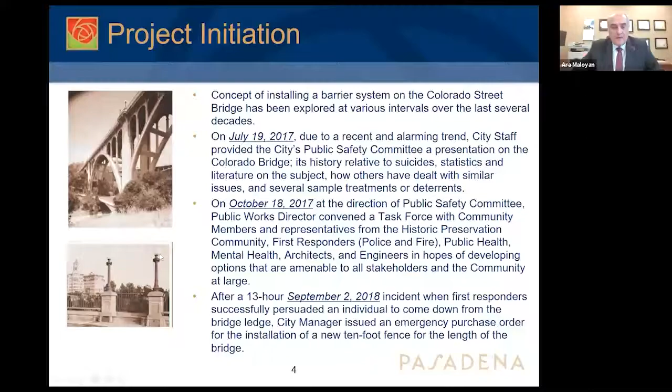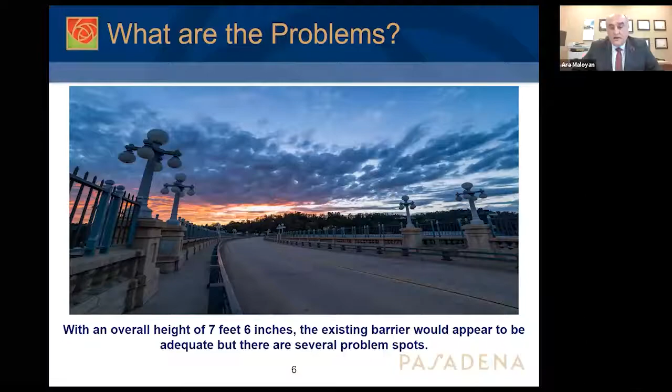Next slide, please. So let's discuss the problem that we identified. The Colorado Bridge was retrofitted. It already had a metallic or picket fence on top of a concrete balustrade system. And even though it had a height of 7'6", it was not adequate to stop people from climbing that fence.

Next slide, please. This indicates the weaknesses of the existing barrier. The concrete baluster was about 4 feet tall, which was a foothold. Then if you stood on the concrete baluster, you had only 3'6" of iron railing to get over to the other side.

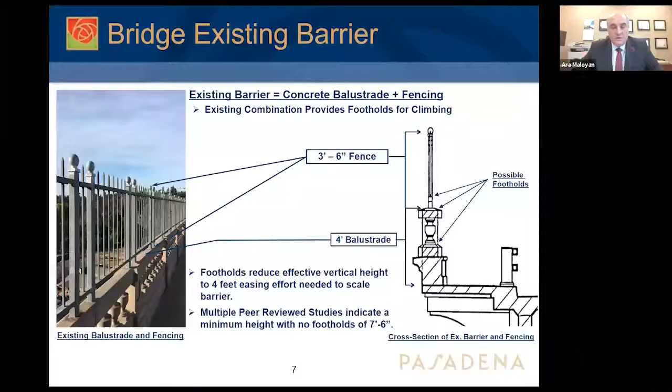Next slide, please. We also found weaknesses in the seating areas, especially what we call alcoves. There were gaps between the fencing and the street light or the balusters for the lights. This was an easy attempt - if you stood on the bench and then on the concrete baluster, you had maybe 2 feet of distance to climb over to the other side of the fence. There are 20 alcoves on the bridge, 10 on each side. This was another identified problem.

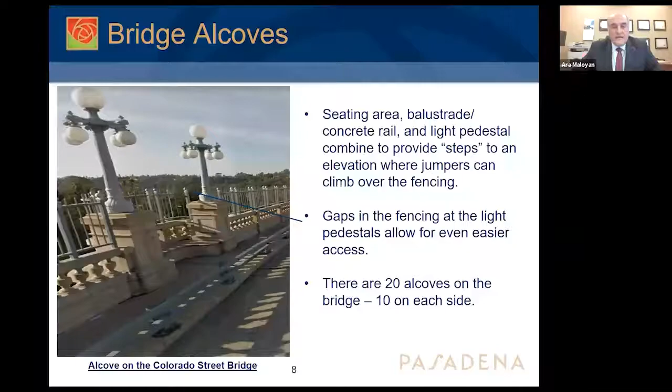Next slide, please. We also identified that at the beginning of the bridge, at the entrances, there was no fencing because the drop-off was not that much.

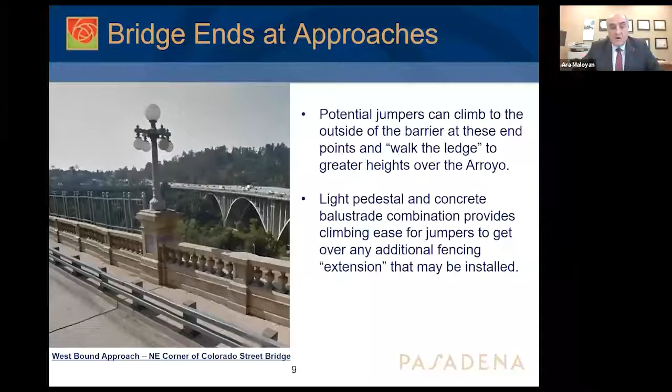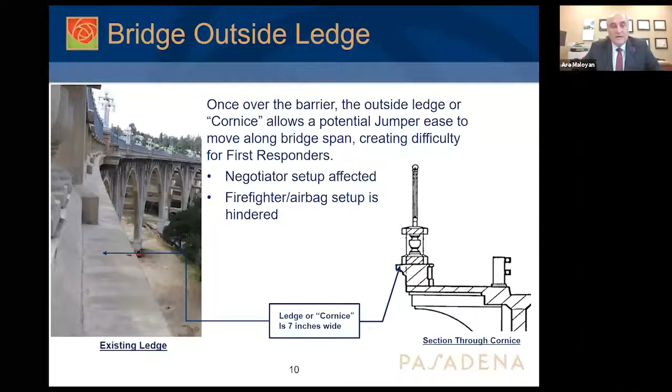People could easily climb this area and walk on the ledge, which we'll show you in the next slide. You could stand on that ledge, and it prevented them from being stopped - they could have walked easily to the middle of the span, and it also hindered negotiations with people attempting to jump. The fire and police departments had a tough time because they would move on this ledge. Next slide, please.

The task force then had several community meetings, and we solicited input from the community, combining all these comments into 5 categories. I'll go over them now, so it's important for us to recap this. There were 5 categories: physical measures, which included physical alterations to the bridge; self-help measures; active measures; post-attempt measures; and changes to the environmental conditions.

So some samples of what these were: one was to install a vertical barrier, add end treatments to the bridge, modify the ledge. For active measures, there were comments that we could install speakers or intercoms on the bridge, have volunteers patrolling the bridge, and install cameras and motion sensors.

Then there were post-attempt measures - if somebody was successful, there would be horizontal barriers, and comments like planting trees and landscaping to soften the fall. Changes to environmental conditions were like modifying the lighting and planting hedges on the bridge. Finally, the self-help measures were signs, phone lines, and text lines to assist folks on the bridge.

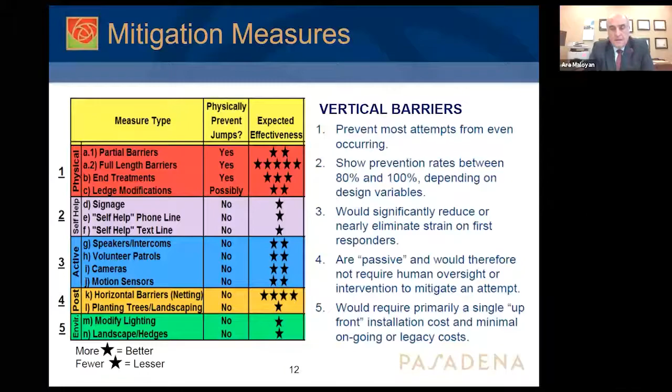So the task force finally came up with these recommendations. The task force recommended to the city public safety committee, and eventually to city council, to install a vertical barrier, 7 foot 6 inches minimum from the highest toe hold, extending both sides of the bridge for its full length. That means the entire length of the bridge will get the same treatment.

Also, we recommended having end treatments so that people were prevented from climbing the slope and walking on the ledge. And we left it open to add any complementary measures - any kind of signage or phone system we had not yet researched could be added to this at the end.

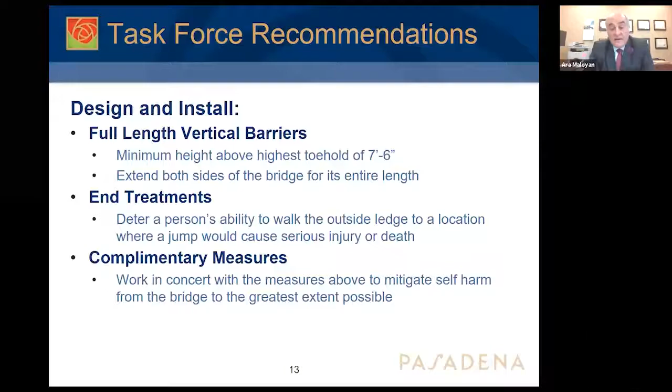So the task force recommendations were given to the Public Safety Committee on April 18th, and then on April 23rd we gave the same presentation to City Council. City Council unanimously approved the recommendations of the task force and directed staff to study the physical barriers.

So when you see the rest of this PowerPoint, it gives you an idea why we're not discussing other preventive measures, because this work was already done. We had our guiding principles from City Council to only look at vertical barriers, which were the most effective at that time. Next slide, please.

Before May 20th, we had an RFP issued to solicit input from consultants with experience in suicide mitigation off of bridges around the world. On May 20th, we went to City Council and awarded a contract to Donald MacDonald Architects for their services. They then started having community meetings and soliciting information on September 26th.

That was our first community meeting, and we had another meeting on October 29th. Then we continued our public outreach through the Historic Preservation Commission, then on to the Design Commission, and finally on February 3rd to the Public Safety Committee.

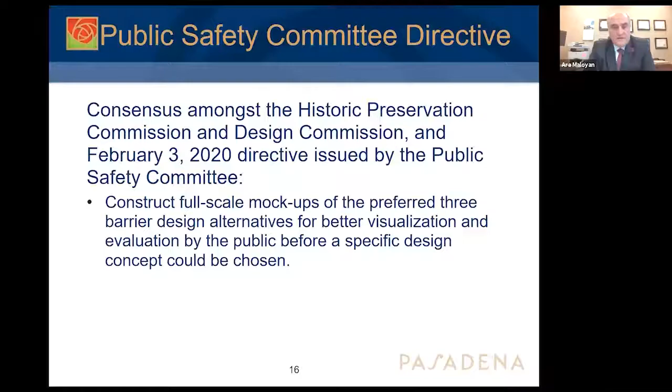Next slide. On February 3rd, the consensus among the Historic Preservation Commission and Design Commission was to construct full-scale mock-ups of 3 preferred barrier design alternatives, so people could visualize the size and effects before any specific design concept was chosen. And then we know what happened after that - we had the pandemic, during which staff were still working on the mock-ups.

The products were delayed, but finally we are here. The mock-ups were installed, and we're starting our community outreach, and we'll talk about the next steps. But at this point, this is just an overview of the project.

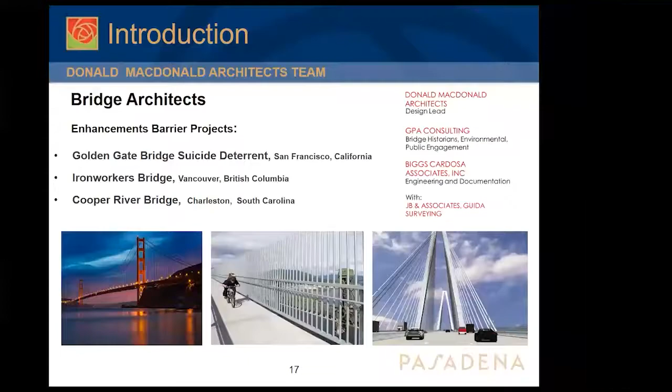Next slide, please. So how do you approach this? Is it just a thing that we're putting up on the bridge? How do you define or design this? We use guiding principles of design, and we settled on 3 core principles.

The first one: the barrier has to be effective. The direction we got from council was to do a vertical barrier. That, as Ara had walked through, is the direction that came out of the task force recommendations. So at that point, we're looking at vertical barriers, and we look for effectiveness.

So what's the effective height? The minimum provided was 7'6". They also talk about toe holds, but we're looking at hand holds, footholds, and other means of climbing the barrier, and making sure we're sealing off the bridge ends.

But equally important is we want to maintain and complement the historic character, defining features of the bridge. After all the public input from our first community meetings, as well as what the task force had heard, clearly the existing balustrade, we wanted to retain that. And then when we looked at the light pedestals, light poles, and fixtures, those are certainly character-defining features of the bridge.

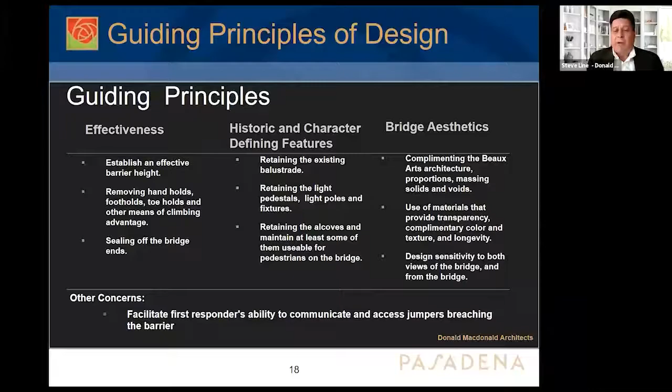I think informing all of these considerations is making sure that we still facilitate the first responders' ability to communicate and access jumpers that, for whatever reason, were able to breach the barrier. We did not want to prevent a direct means to get them back. As Ara said in that one slide, even after 13 hours, they were able to successfully get somebody back, and we did not want to impede that ability.

So next slide. Just a few things on barrier effectiveness. We look at climbability. Based on our studies and analysis, we thought 7 foot 6 inches was really the minimum. We find that being able to reach a horizontal element that you can pull yourself up and over is 9 feet from a position where you can't jump, and 10 feet if your foothold allows you to stretch. Many people can jump up to 10 feet, and usually 9 feet is just outside the grasp of most people. So that's one of the informing criteria we used on finding an effective height.

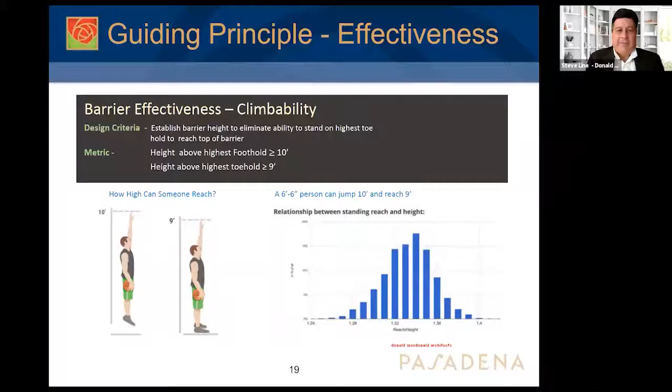Next slide, please. Certainly it's not just reaching, but people are very adept at climbing. So we wanted to make sure that we eliminated the ability to climb lamp poles or shimmy between poles and the barriers and other methods of climbing and breaching the barrier. That also informed keeping the stretch and grasp distances to the top of the barrier around 7 feet. This informed, and I'll talk about this later, where we had to position the barrier around the alcoves, leaving them open but still protecting people from the ability to climb up the poles.

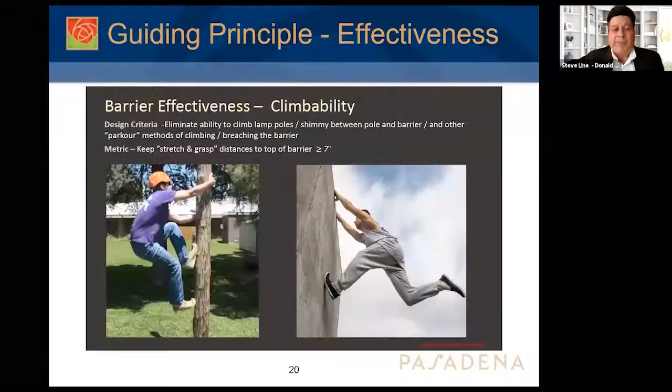The next slide, please. Again, the historic and character defining features. I've talked about the alcoves, but also the pilasters that the lamps are sitting on, and as I mentioned earlier, preserving the balustrade. These were key elements that we wanted to preserve as character defining features of the bridge. Yet each of these elements provide footholds and toe holds and the ability, as Ara said earlier, to climb on and get up and over the barrier. So we had to take all of that into consideration.

One of the considerations we looked at is what the impact would be to the lamps themselves, their current height and proportions, again character defining to the bridge. So what are some mitigation strategies we can use to retain and maintain that and still provide the effectiveness we're looking for? We'll talk through that. We did at one time consider actually lowering the bases of the lamp poles to be more in line with the top of the balustrade, giving us a bit of an advantage, so the barrier itself may not have to be so high. But in earlier meetings it was decided that the height of the pilaster was more desirable.

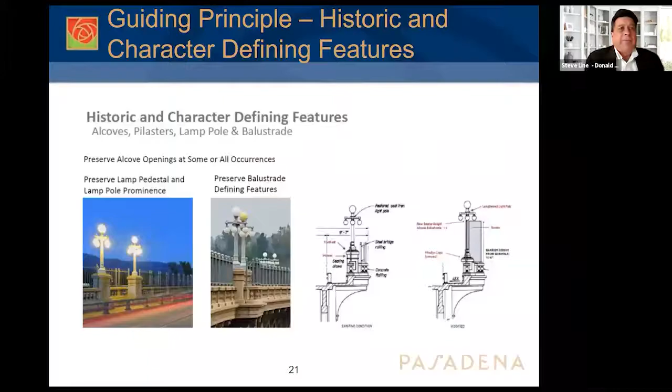Next slide, please. I'd like to ask Don MacDonald to give us some overarching ideas on the guiding principles of the bridge aesthetics and a little bit about the bridge.

Thank you, Steve. I'm glad I'm still part of this team, and that we're still serving this major heritage bridge. What I like about it, there's a vocabulary out there. As Steve's probably mentioned earlier, the elements up on the bridge now are for transparency. The theory is to continue with the vocabulary of the bridge, massing solids and voids, and bring that into the barrier detail later. The transparency is very important. I think Steve pretty well covered everything, but I'm really concerned that the bridge has a long-lasting design to it, so we'll work very hard to finish up this rail. We're very sensitive, over the past, at least in my experience, to the suicide issue. So I think this solution is well on its way. The transparency is very effective, I think, with those prototypes that are up there. But that's about it for me, Steve.

Thanks, Don. Appreciate that. As Don said, some of the character defining features in the bridge aesthetics we're incorporating include the pattern and rhythm of the balustrades, the corbels, and the elements coming off the top of the arches. There's also a hierarchy of structure implied in the bridge. Some of our posts and vertical elements of the barrier are in alignment with these existing features. They do change over the length of the bridge depending on the span of these arches, so our fencing details or barrier details will follow that pattern and rhythm, changing accordingly to match.

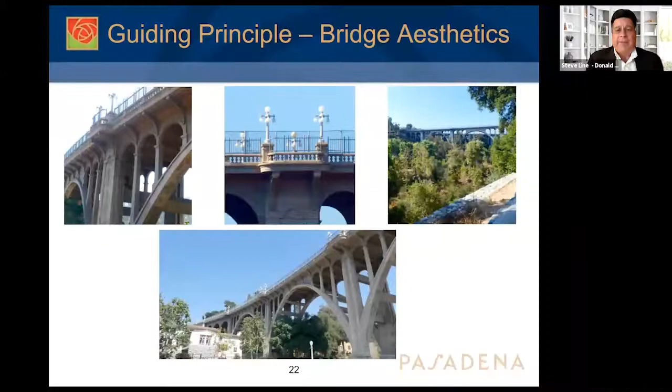I'm going to talk as we get into some of the more of the mock-ups, what the intent was, and still some of the options that we're looking to refine the look of it to dial it in. So I'm going to talk about options and mock-ups, but I just wanted to talk quickly about a few things.

We had limited opportunities on the end of the bridge with the lamp poles to do a lot of mock-ups. We chose the two that are out there now, and we'll talk about those, A and B. And then we put two panels out in the middle of the bridge, fundamentally to do two things: to see how transparent these panels are looking, the views of the bridge. In the proportions we decided on the mock-ups at this point were to minimize the amount of material that's necessary to frame the barrier.

To make sure that we're being as unobtrusive and providing as much transparency as possible, to the point that from a distance, some of the material basically disappears and you're just left with the frame. We know that there's some work left to be done to get the frame proportions a little bit better. But at this stage, we just wanted to see what our minimum options were to be able to still meet all the seismic, structural, and wind loads and yet provide the transparency.

The other thing that we'll talk about in a minute is the materials, and I'll go through that in a bit. So looking at the effectiveness, so that would be the height and the ability to climb or inability to climb. The bridge aesthetics, which has a lot to do with the transparency and the blending, and then as well as retaining the historic character defining features of the bridge, alcoves, the balustrade, and the lamp poles.

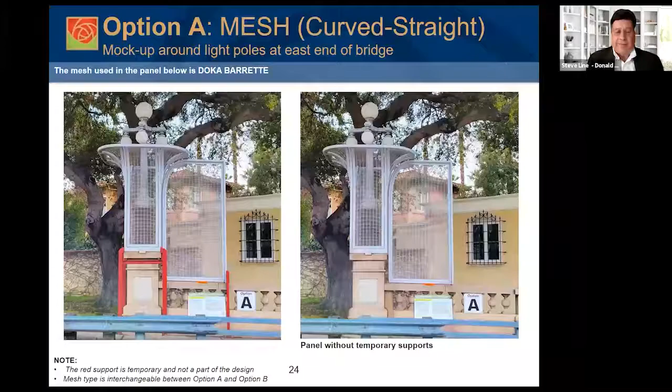Next slide, please. This is what we're calling option A. I wanted to point out, if some of you that go out there notice that we don't have any of the mesh material on this particular installation in the back of the lamps, and that is intentional. It keeps these from becoming baskets, if you will, for trash and debris. It saves cost, and from a visibility point of view, when you look at it from the other side, the mesh fundamentally disappears. So the idea here is that from afar, looking at the views of the bridge, it's really not noticeable, but that's why we're doing the mock-ups, to get everybody's thoughts on that as well.

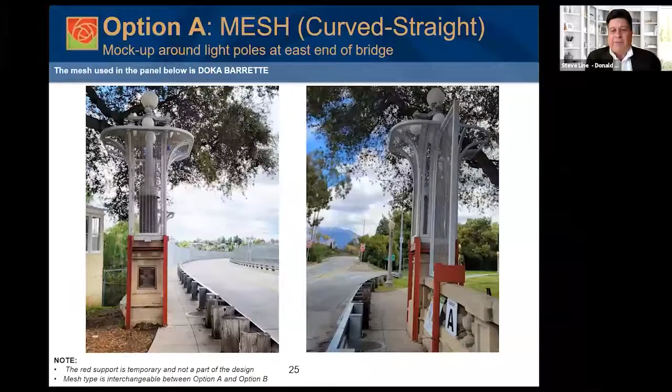So that's this slide, and this is what we're calling option A. We're going to show some different illustrations. This one is showing what the barrier looks like spanning between the lamp poles, and how the lamp pole treatments in parallel work, giving us the ability to keep the alcoves open and still have an effective barrier, eliminating the ability to climb the lamp poles. The detailing at the base is such that there's really not an ability to get a toe hold at the top of the pilasters.

And we're retaining a 14-foot high barrier along the length of the balustrade, so that anybody climbing up there still has an extremely difficult time to get over that. Almost nearly impossible, we hope.

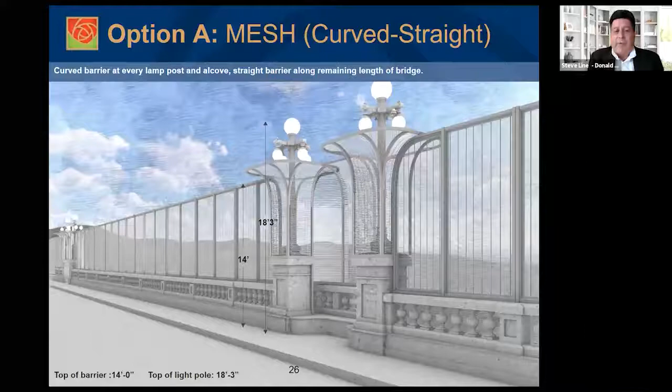We're going to talk about the materiality, but I'll mention that this particular material we're showing is a stainless steel mesh, with a lifespan of 80 to 100 years at least, if not more, and it's meant to be highly transparent. Some of the early areas we looked at were actually using glass panels or some type of clear solid panel between the posts. But for wind loads, and a bunch of other criteria, we felt we could get almost the equivalent transparency for most of the experiential elements of either driving on the bridge or viewing the bridge. But again, we wanted to do the mock-up to make sure that assumption is correct.

So this is what we're calling option A. Again, here's the view on the bridge. You're going to see that depending on what material we selected, the transparency is quite good with almost any of the materials we're looking at when it's perpendicular. But when you're looking along the bridge, the more vertical elements, like in the pickets, that's what we call stacking, and pretty soon you don't see through the pickets anymore. What you're really looking at is pretty much a wall of metal without the transparency. So that's one of the key defining elements. Besides the look of these barriers, there's also the functional difference in transparency.

This is a view of the bridge, and again you can see the patterning matching the corbels. This is very simple, non-decorative. We're not trying to copy any of the arches or pick up an element of the bridge, making this look like it was installed at the same time the bridge was built. But at the same time, keeping it simple and transparent as much as possible, retaining as much of the visual character that we can.

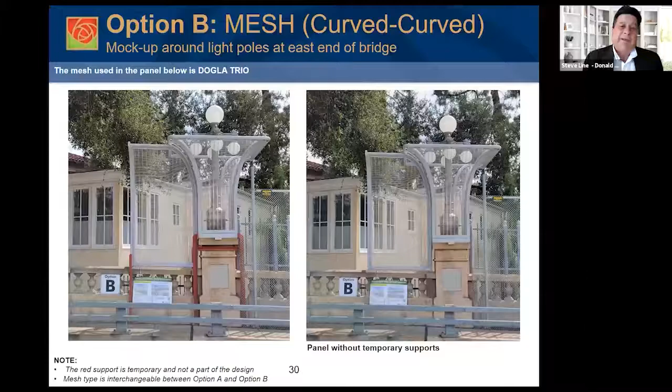In this version, we've tried to eliminate as much of the structural framing around the lamps as possible to provide the most transparency. Steve, this is Don. I think what's good about this one, the curve, is it does pick up the curve of the arches below the bridge, so there's a bit of a tie back in that existing vocabulary.

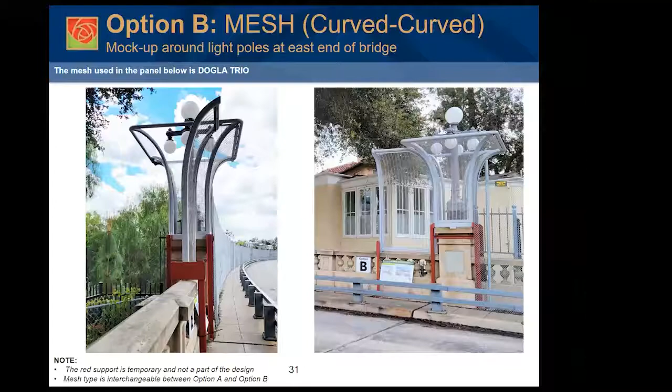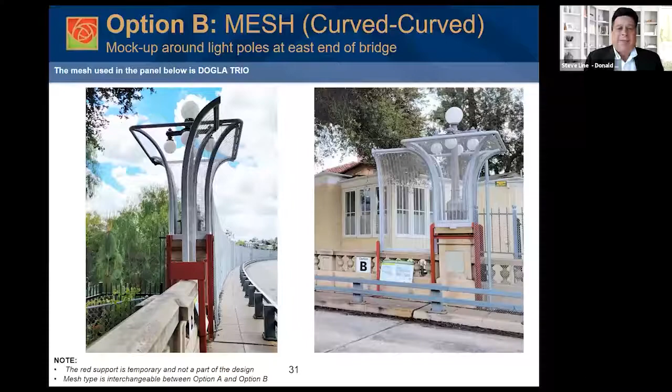Yes, thank you, Don. We were also very intentional about using a curve, a portion of a curve, that minimized as much as possible what people would call the standard Caltrans fencing effect or the prison effect. So this is not a straight radius curve at all—it's a multi-radius curve, so it's got a much more organic shape to it, picking up on some of the architecture of the arches below, really trying to minimize and avoid as much as possible that sense that this is a curved barrier like a prison wall. It's much more meant to complement the arches and at the same time reduce the overall height of the barrier and the treatments around the lamp poles, while still retaining the full effectiveness of the barrier itself.

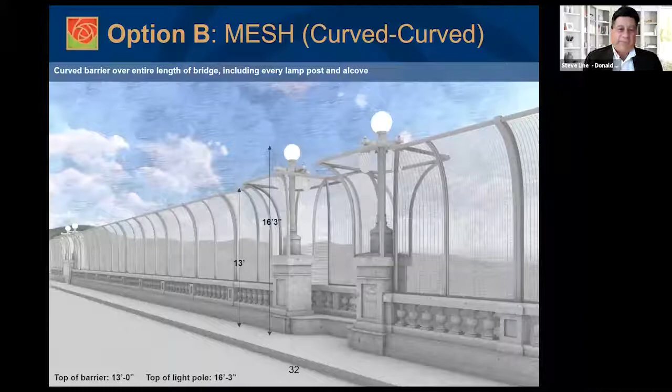So again, the view of what this looks like. Certainly there's a whole spectrum of opinions on if this concept's successful or not aesthetically, but it is lowering the height, and the view of the bridge is almost the same. It's just when you're on the bridge, it does pick up that curve pattern.

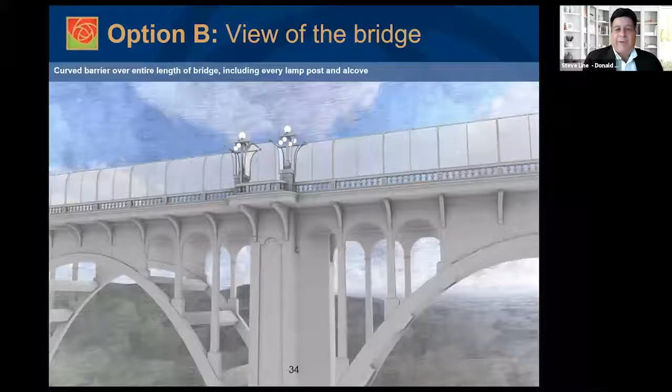And then this is looking at it from below. Again, almost indistinguishable once you start to step away from the bridge, and it's as light and transparent as possible. So that's option B. Now, option C.

We just did the panel on the west end of the bridge, and pickets. There was a lot of interest in looking at pickets, which is pretty much identical to what's out there now, only raised to be a more effective height. The problem with pickets is they're highly breachable.

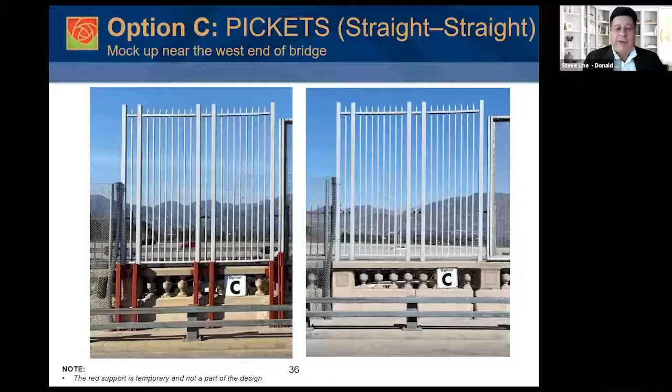So this is really introducing many more options for people to climb over it, like that parkour method, people shimmying up posts. This presents that opportunity much more than the mesh. And I'll talk about why the mesh, it's woven fine enough that you can't get your fingers or toes in any of those slots.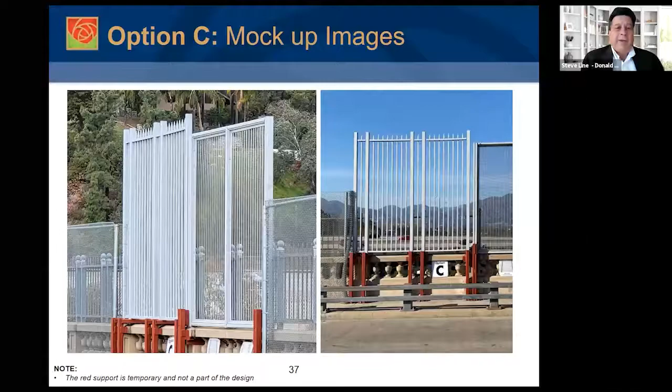It's an attractive solution, but as you can see here in this slide on the left, you can start to see that stacking effect I mentioned earlier, where the pickets start to fill in the field of view. This is not really that much of an angle, and while the mesh maintains its transparency, the idea behind the mesh is to maintain that transparency.

So with the pickets, I think many people find this attractive when you're on the bridge, and looking at it at a standstill. But as you can start to see in some of these images, again, it's a wall of pickets, and so you lose the transparency looking through it. Not completely, but certainly much more so than you do with the mesh.

If you go back to the previous slide real quick, you can see that it's a similar wrap around the lamp poles. These aren't flared. We can do this with mesh as well, so it doesn't matter whether this is picket or mesh. You'll just have to use your imagination filling in the different materials.

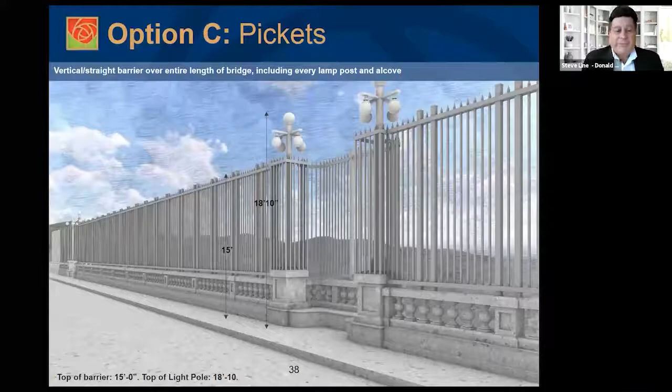But now you can see the height of this is 15 feet to accommodate these horizontal rails that the pickets require for constructability, and it pushes the lamp poles up quite a bit. So this option is the highest barrier and requires the most modification to the lamp poles.

So again, this is just on the bridge. And so this is the view of the bridge. And as you can tell, when we do this, even though many people find this quite attractive, it is now competing a little bit more with the bridge itself. It's becoming an architectural element of more substance.

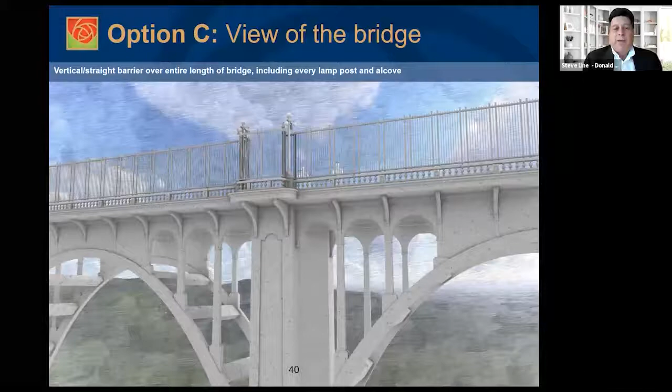And with that, then it's starting to be more part of the bridge and less a treatment. I just throw that out there without an opinion on which ones appeal the most to you, but there is a distinction there.

And similarly, where we saw that the mesh barrier material starts to fade away quite effectively, just the pure fact that there's more steel up there with the pickets, it certainly does not blend in as readily.

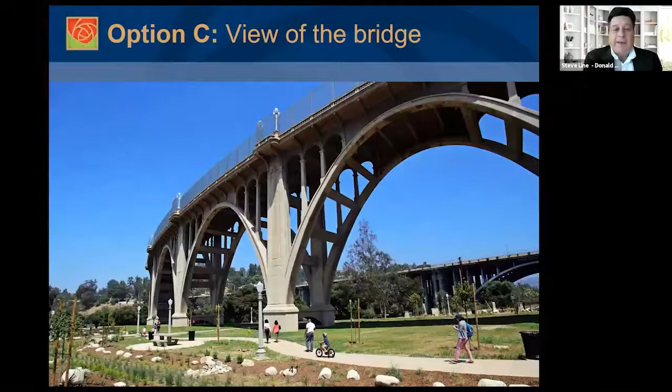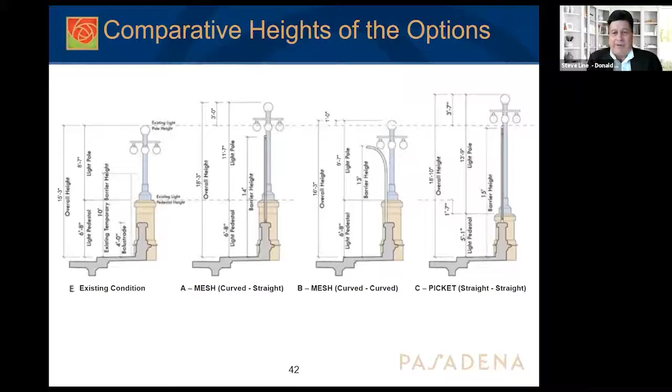Again, this will be on the website. I think it already is, but these are just some of the comparative tables that you can see with these various options.

We think A and B are similarly effective, with B being a little bit less tall. C is the most tall and at the same time the least effective.

From a historic preservation standpoint, with the character-defining features in option A, we're retaining the light pedestals at their existing height, but putting a base on the light pole of nearly 3 feet. After looking at the mock-up, we can adjust that to exactly the right height. Option B, by introducing the curve, lowers the overall profile, so we only have to lengthen the light base by about 1 foot, which is less intrusive to the light poles.

For C, we actually have to lower the light pedestals because we've got to eliminate that bottom toe hold. So we lower the pedestals and have a higher fence. I just wanted to share this as a comparative table.

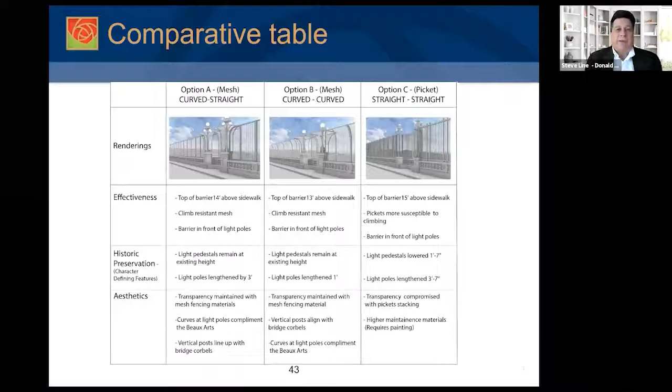I want to talk a little bit about what we have up there in the form of mesh. This mesh that we selected has a bright finish on it, and I know it's been highly reflective in the afternoon sun. We can mitigate that, but this was the available material we had for doing the mock-up. So we went ahead and used it, but I want to suggest that we're aware of and have means to eliminate a lot of that glare, if not all of it.

What you're looking at here is stainless steel mesh, with the distance between the openings such that if you go out on the bridge you can feel it, but you can't get your fingers in there, you can't get your toes in there. So you're not climbing over this.

We did study many different patterns of this mesh, but we wanted to make sure that whatever we chose first met the effectiveness characteristics, met the transparency characteristics we were trying to maintain. The patterning and style is really experienced only when you're right up against it, and from a distance it kind of disappears a little bit.

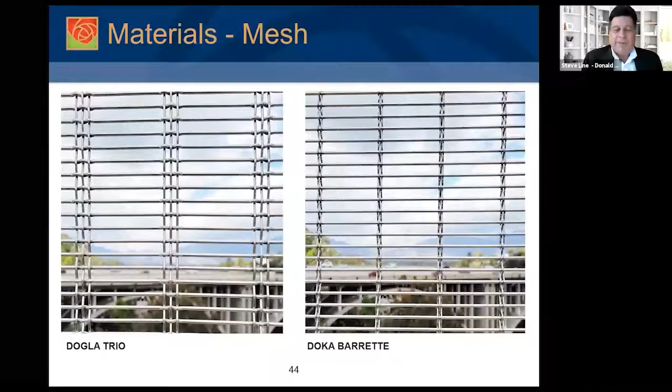Please vote on or take a look at this. I think I've talked about the mesh and the pickets.

The intent of these panels in the middle of the bridge is to give you a sense of the scale, the proportion, the height difference, and also the transparency. These are really meant to be looked at from afar, from the various vantage points around the bridge, which is why they're out on the center, so you can take a look and see what they look like on the bridge from a distance.

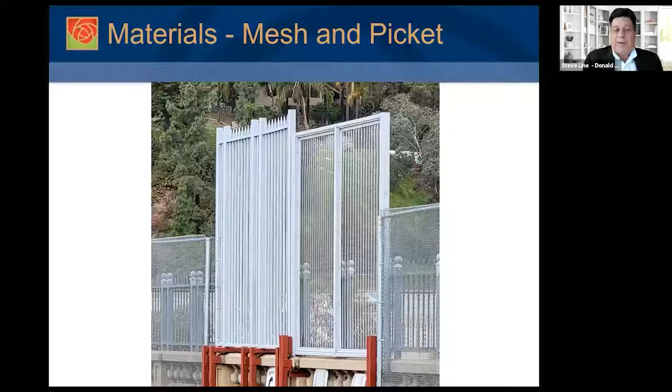I'm going to turn this back to Ara and the city team to talk about next steps.

Thank you, Steve. The next steps for us are basically to listen to the community and gather information. So from now till May 30th, 31st, is the period for folks to vote and take the survey. We are slated to go to the Historic Preservation Commission on April 20th, and we're tentatively scheduled for the Design Commission on May 11th.

Depending on comments we receive from now until we go to the Design Commission, we may have to alter some of the design concepts. For that reason, we don't have a final date for public safety, but if all goes well, the first opportunity for us to go to public safety will be sometime in June or July. After that, depending if the public safety committee supports the project, we'll go to city council.

So for now, there is going to be plenty of time for community input. We may do one more community outreach like this, depending on what we hear from folks if they need to hear this, although this is recorded and will be available on our website for everyone to listen to. But if the need arises, we will definitely do another community meeting like this. So those are the next steps for us.

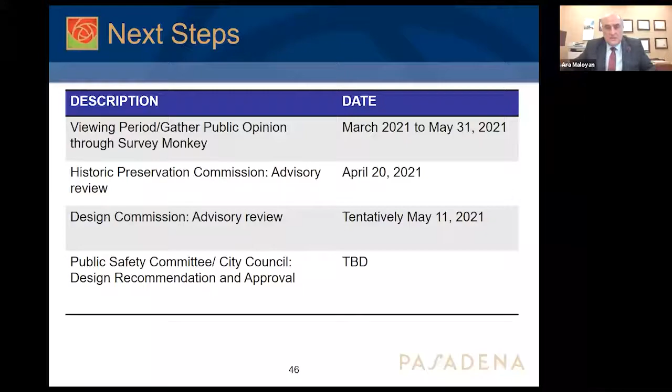Yes, Ara, we've received some comments during the presentation. I also wanted to go over the survey website that everybody can go to.

If you go to cityofpasadena.net and search for Colorado Street Bridge, the first hit at the top of the screen is this project page. On the right side, you will see the contact information for giving your feedback for the survey, as well as an email address that goes to the design team for any questions you may have after this meeting. Below that is a link to upcoming events.

Like Ara mentioned, for the Historic Preservation Commission, this is scheduled for April 20th. Below at the bottom of the screen, you will also see all of our past agenda reports, as well as meeting notices and minutes from prior public outreach events.

That being said, I will go through the questions that we have right now. This one's for Steve: the metal risers in the mock-ups underneath the lamp posts appear to be like what you put underneath a fire hydrant. How would you address raising the existing lamp posts, or would they be new lamp posts?

So we're looking at two things. Those mock-ups are just painted black right now, holding up the lamp poles - those are not what we would use. The two options are, depending on the height, a pedestal that would be complementary, a little more decorative than just the columns that are there now. We would pick up some patterning similar to the lamp poles. The idea, which I know is of interest to many people, is not to modify the lamp poles themselves, but set them on the pedestals.